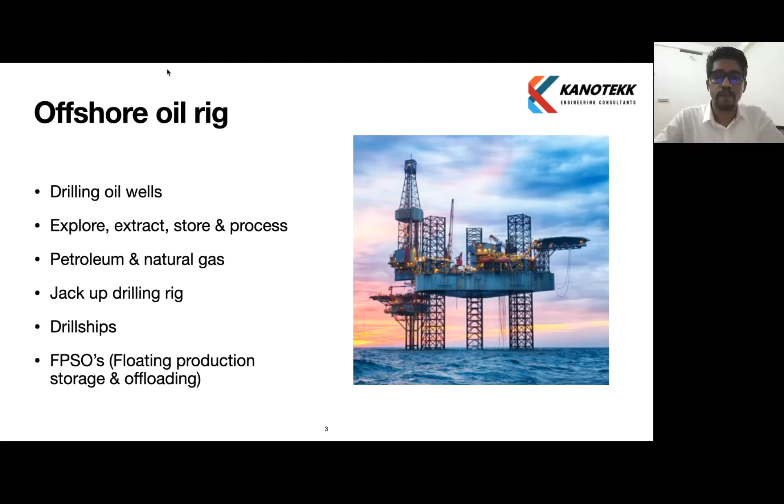Similarly, there is a jack house where the jacking gears are. Also the accommodation for the crew. And the leg has a footing called a spudcan. We will not be going into much detail on the entire oil rig features, but this is a brief intro before proceeding to the piping systems.

So for the offshore oil rig, we can see two views here. The first one is the machinery deck top view, where all the equipment is arranged. The second picture is the top view of an offshore oil rig, where we can see the helideck, drill floor, leg positions, crane arrangement, lifeboat arrangement, etc.

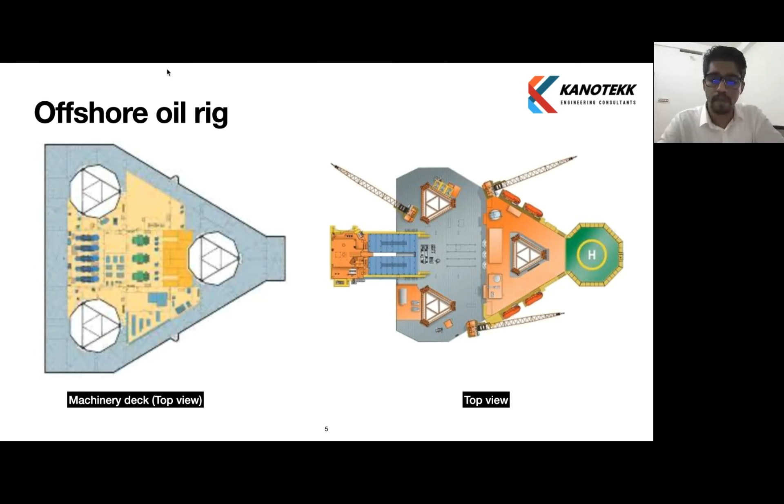Okay, so in this picture, we can see the offshore oil rig in two elevated conditions. One is just elevated above the water, and the next one is at a much higher height. It is just shown for better understanding. Below water, you can see how the legs are positioned. The footing of the legs has the spudcan.

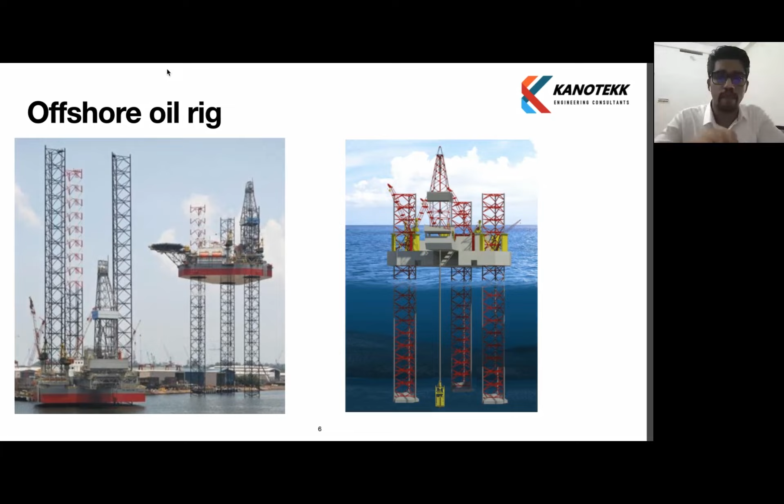Okay, just for better understanding, we will see how an offshore oil rig works. These oil rigs are not self-propelled, so for whatever movement is required at sea, we use tugs. The floating rigs are pulled using tugs. Now the process taking place is positioning of the rig to the drilling platform. The rigs are towed to the drilling platform.

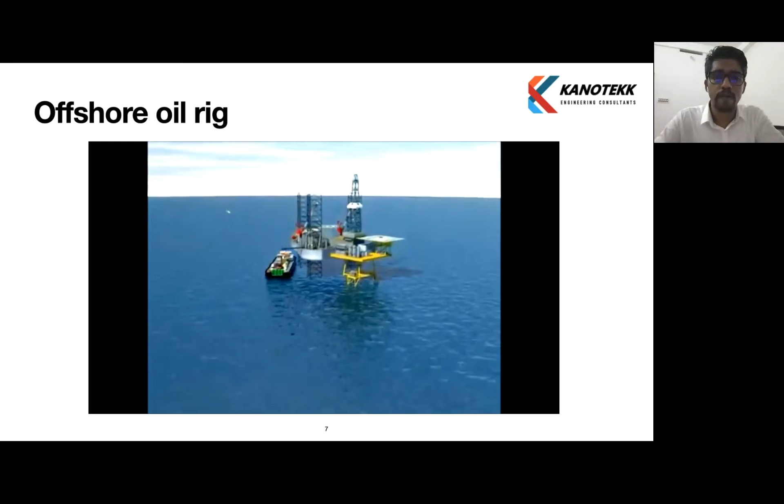The legs are lowered. The leg touching down now, that is called the soft pinning operation. Once it reaches there, the hull body is jacked up and the leg pierces down into the seabed. The rig is filled with water, which is called the preloading operation, which adds more load so that the leg pierces more. Again, the water is dropped out and it's jacked up. Now the cantilever is taken out to the drilling platform. That is the basic operation of how a rig is brought into location and drilling is initiated.

Next, we can categorize the third part to the drilling part, which includes the mud systems like low pressure mud, bulk mud, cement, and high pressure mud cement piping. Similarly, choke and kill manifold piping, BOP piping (blowout preventer piping system), drill water system, and well test oil and gas system. Also, the fourth part is accommodation piping systems, which includes the freshwater system and the earlier discussed sewage system, which comes part of the accommodation.

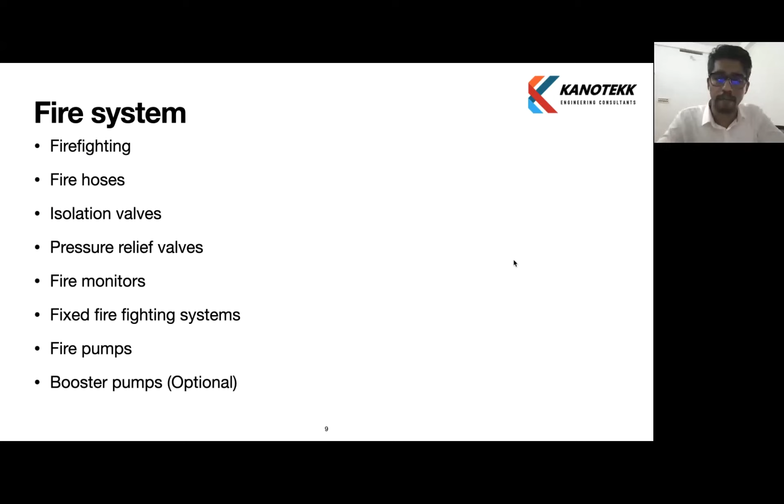First we will discuss the fire system. This system is used for firefighting, like any vessel, ship, or industrial purpose. So in this system, we will see how the system concept is, what all equipment are there, like fire pumps, fire monitors, fixed firefighting systems, fire hoses, valves, booster pumps, etc. We will go through the equipment and gain a concept of the system.

When we see an offshore oil rig fire system, it's basically categorized into two conditions. First is a floating condition, which we can see when the rig is floating, being towed to different locations using a tugboat. So this is a floating condition.

The next condition we are seeing is the elevated condition. In elevated condition, we can see the hull body of the rig is jacked up, so from the bottom of the hull body to the seawater level, that gap is called the air gap. So fire system will be discussed in two cases, one in floating condition and one in elevated condition.

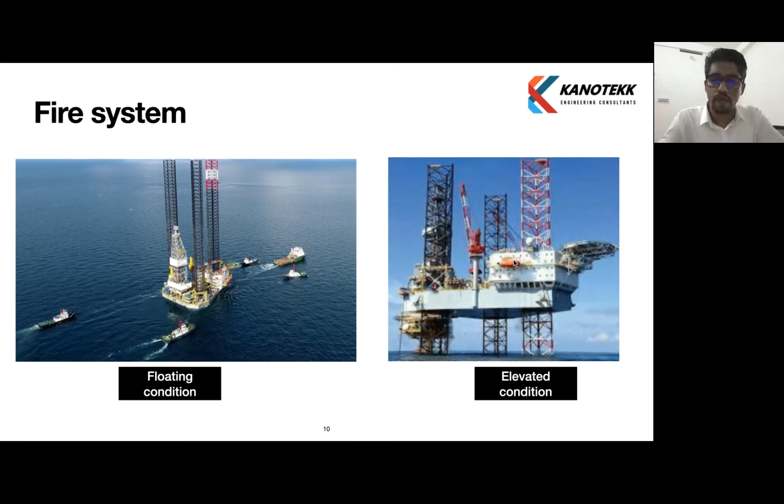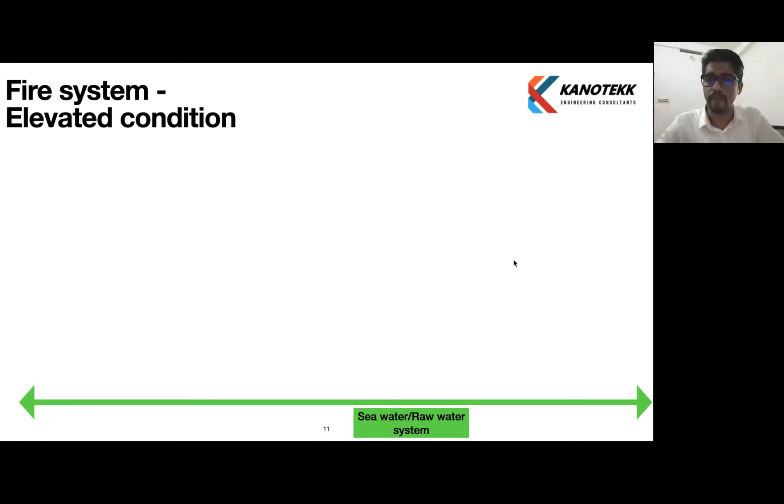So we'll see about fire system design. Now what we are seeing, the green line, is the seawater or raw water system. This is the main seawater system which is supplying the rig with all the seawater requirement. So in elevated condition, this is the first condition, fire system in elevated condition.

We will have two fire pumps, one main fire pump and one emergency fire pump. This is an ABS requirement - minimum two independently powered fire pumps are required in marine vessels, ships, offshore rigs, etc. Not only ABS, other classification societies like DNV, Bureau Veritas, and others all recommend these two fire pump requirements as per SOLAS requirement. So the main fire pump can be electric driven or engine driven.

Any form can be provided. Similarly, the emergency fire pump should have an alternate source of power, like in case of main power failure, there should be an alternate source of power. It should be either engine driven source or another emergency electric power source from an emergency generator, which is widely used.

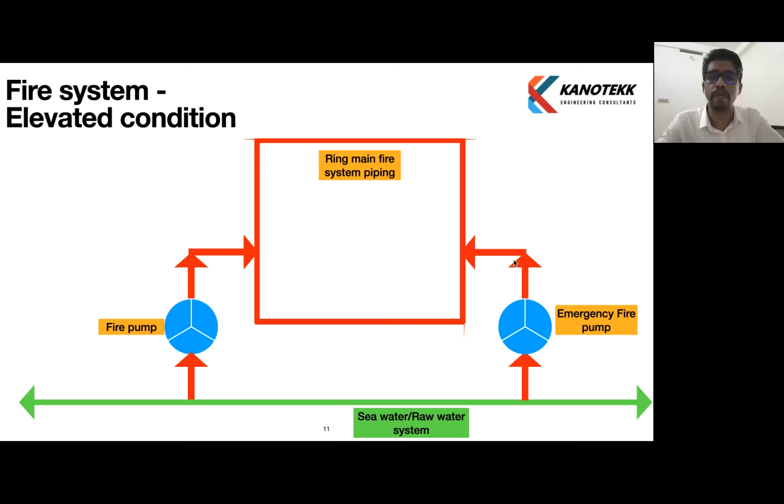So we will see the system. It takes suction from the seawater system of the rig and supplies to a ring main fire system. This is a general concept of a system - each rig will have a slight change in the design. In some rigs, it may not entirely be a visible ring, but as per design, it will be a ring main fire system which supplies to accommodation, helideck, drill floor, machinery space, and all decks.

So for firefighting, we'll have fire hydrant hose locations throughout the rig in all locations, all machinery spaces, accommodation, decks, main deck, drill floor, cantilever area, helideck area, etc. Helideck has a separate requirement - helideck needs foam firefighting. It is a marine class safety requirement that helideck needs foam firefighting, so for helideck we provide additional foam tanks which will supply foam for operation.

Similarly, helideck has two firefighting methods, which we will see in future slides. So this is a basic concept of a fire system, and we need isolation valves. We provide valves accordingly so that any breakage in the system at any part will not hamper the system, will not completely collapse the system.

It means if I supply to a machinery space, if there is an explosion and the fire line breaks, we should be able to isolate the fire line from the next compartment so that we do not lose the entire firewater in that compartment. If we lose firewater in that compartment, apart from the explosion, it will lead to flooding, which will lead to more damage. So to prevent that, we have to isolate the fire system from the next accessible compartments. So every compartment will have an isolation valve on the fire header system.

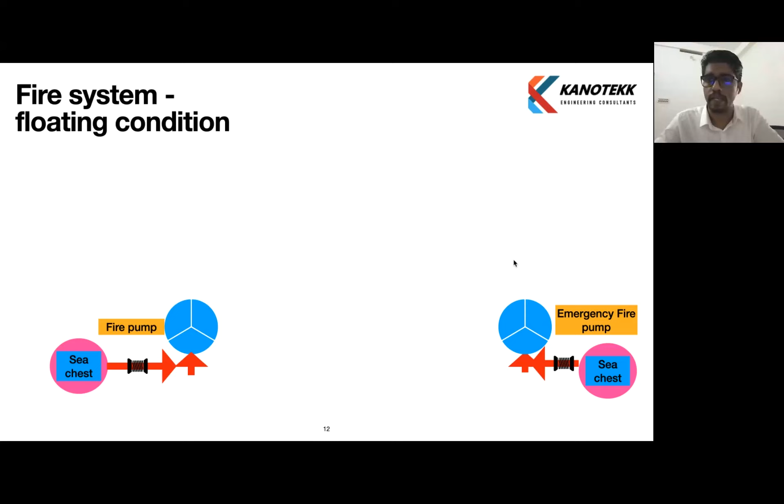So for taking suction for the fire system, in this floating condition, we take suction from the sea chest. The system entirely remains the same. The only difference is the suction point changes. All the supply, all the isolation, everything remains intact.

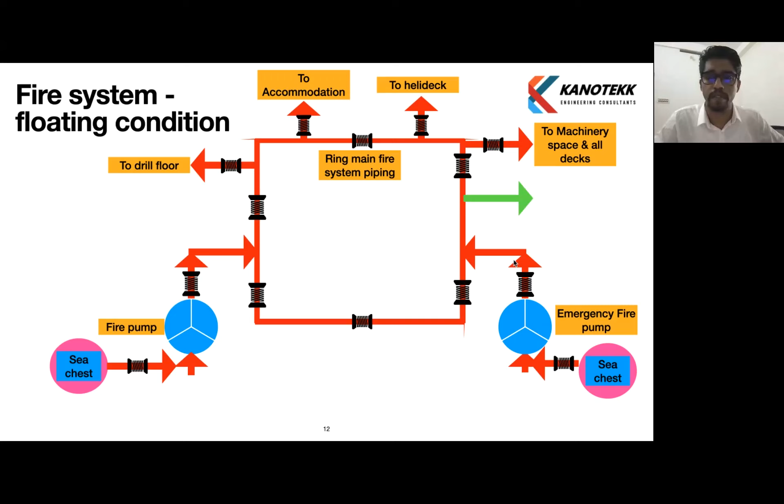So since the raw water system does not have a feed during floating condition, these fire pumps supply a feed to the raw water system. That is how the seawater system in the rig gets water during floating condition. But there will not be much consumption for seawater because in floating condition there is no drilling operation. Drilling operation always takes place in elevated condition. So floating condition just has a minimum requirement for seawater, which will be met using fire pumps.

Okay, so this is the basic concept of the fire system. It has two conditions, elevated and floating. In elevated condition, suction is taken from the seawater header lines, and in floating condition, it's taken from the sea chest. Once this concept is clear, designers can design accordingly. Based on the rig design, routing can be done accordingly, and valve placing can be done in a wise manner.

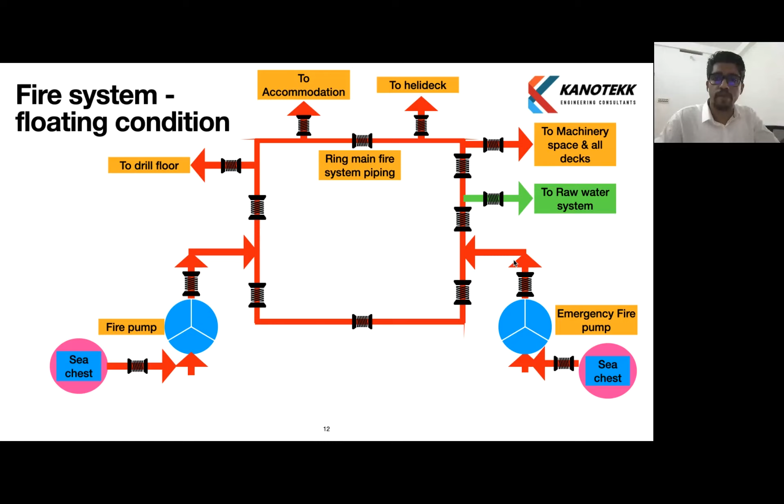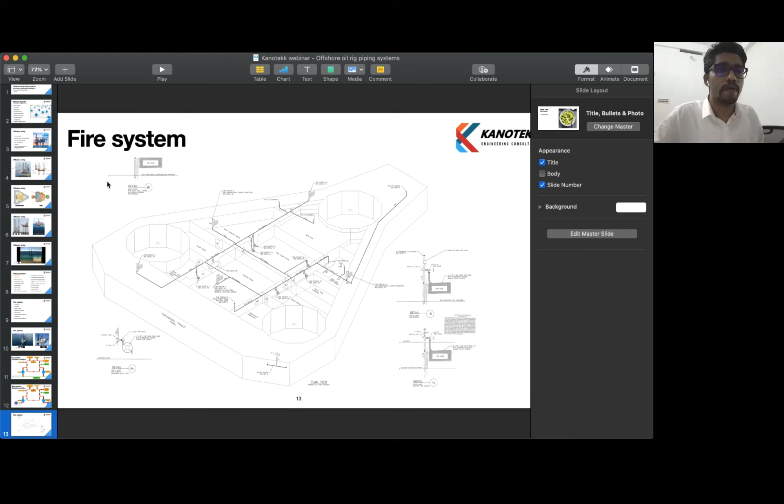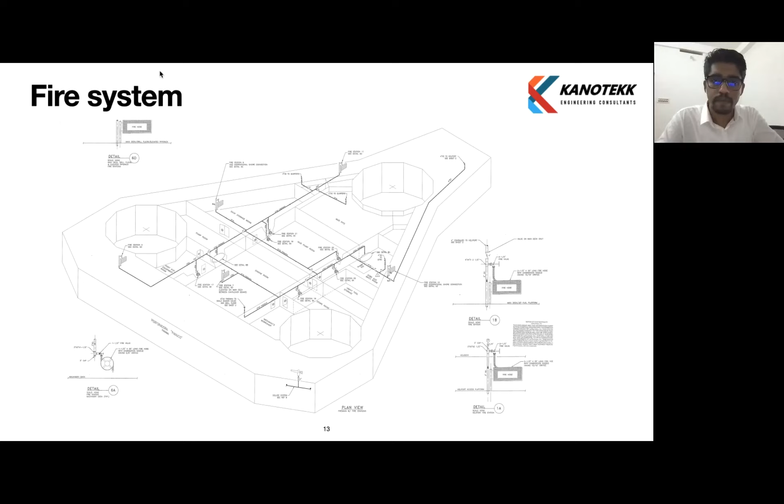Okay, so fire system design, we can see the layout, how the pipes are routed through the port side and starboard side. This is the general layout; each rig will have a different design. Similarly, there is supply to the drill floor, cantilever area, and shale shaker area. So there is a detailed design part.

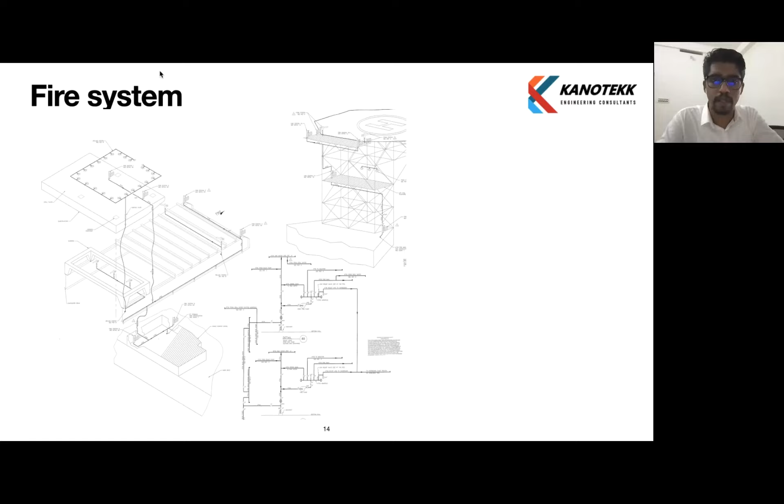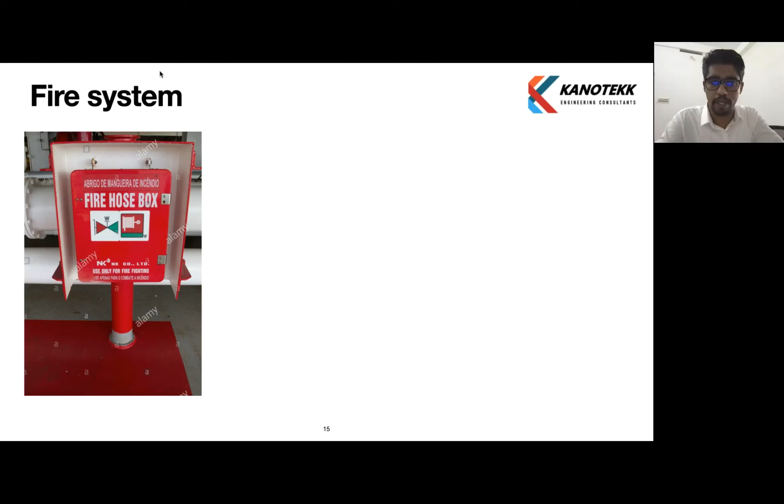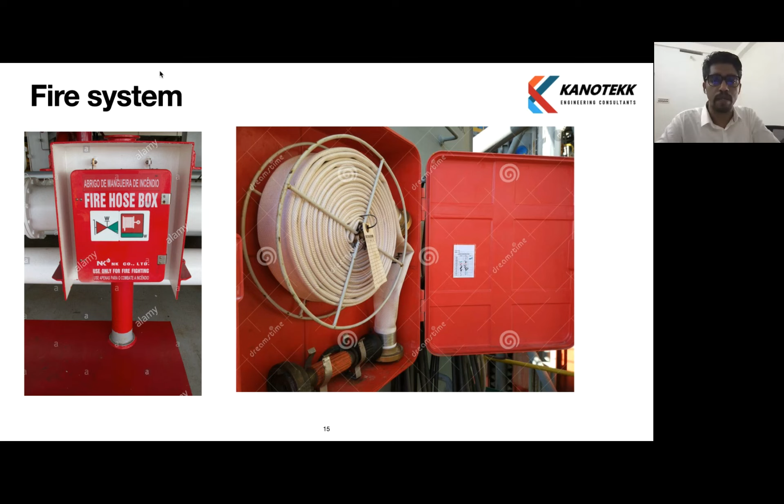Okay, for the fire system, we mentioned that fire hose boxes are positioned in different locations throughout the rig. So once we open the box, this will be the arrangement of fire hoses, like how the hoses are kept inside with a nozzle connection.

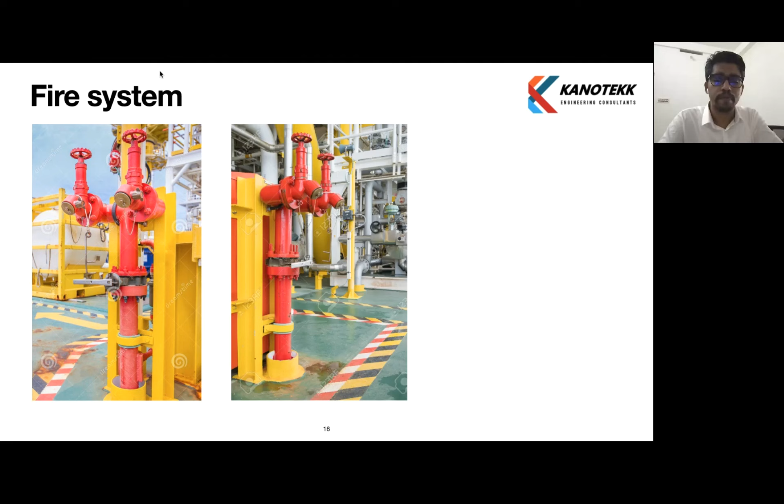Okay, another view of hydrant valves. It's another view of the hydrant valves.

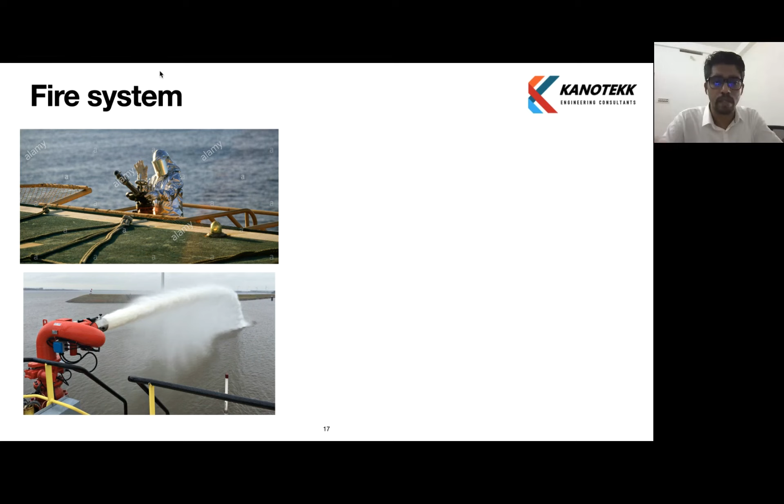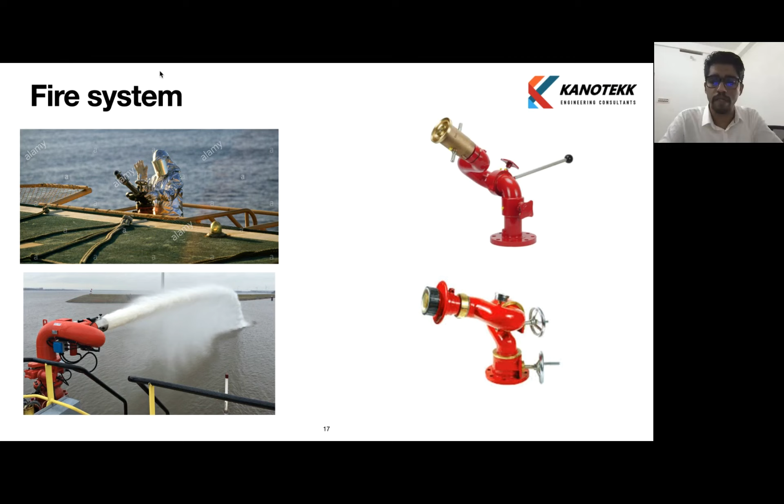Okay, this is for the helideck. For helideck firefighting, what we are seeing is a person operating a fire monitor. We'll see more photos on that. So when a fire monitor is in operation, this is how the throw of water can be seen. This is the view of fire monitors, which have movement; we can manually operate it to the required direction.

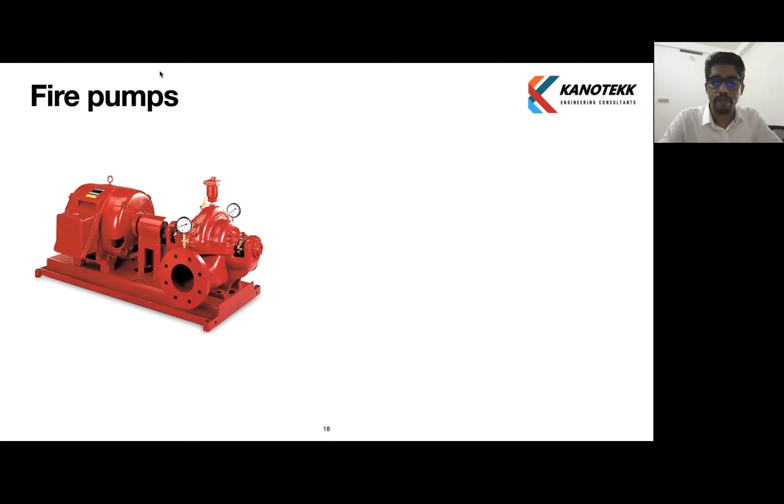Okay, this equipment we are seeing is a fire pump. The second picture is a fire pump layout in a fire pump room. The second one is an engine-driven fire pump, where we can see the exhaust lines and all the routing provided.

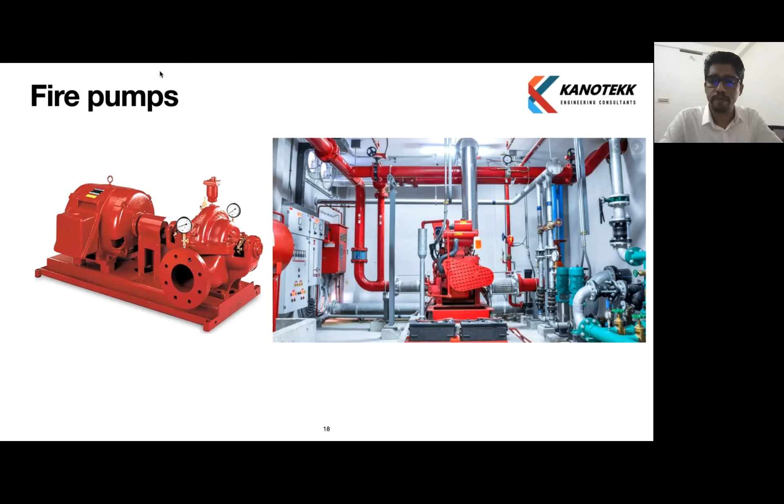Okay, fire system in helideck. We have actually two options for firefighting in the helideck.

One is using fire monitors, that is the picture which we see here. Fixed monitors are located throughout the helideck at different points, so it can be operated by personnel.

Similarly, the second picture shows the deck integrated firefighting system, called the DIFFS system. This deck integrated firefighting system enables firefighting without direct personnel operating equipment. It just has to be activated from the activating point, which is below the helideck.

Once activated, nozzles are positioned throughout the rig, throughout the helideck point. The usual arrangement is around 16 to 20 nozzles, but depending on the helideck size, this nozzle number varies.

So these nozzles, once the system is activated, spray water, which we can see now. It will spray water for 5 minutes, which is as per the rule requirement.

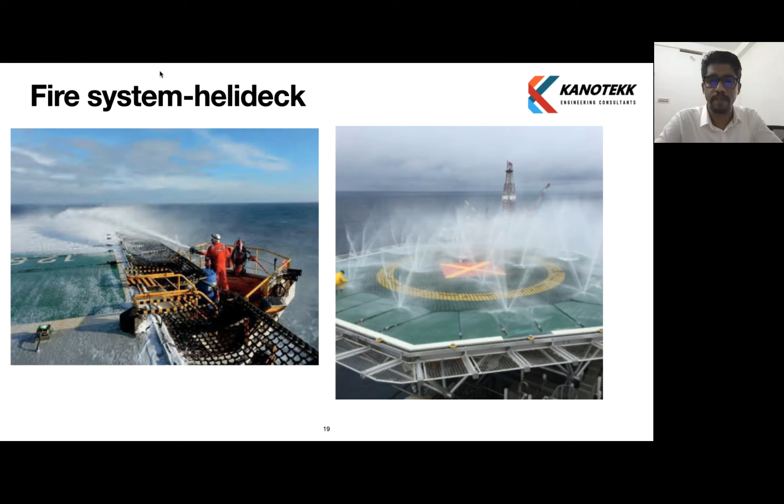Okay, we earlier discussed the fixed firefighting system. So fixed firefighting system, like now we can see in the slide, first picture, which is the emergency generator room CO2 cylinders. Similarly, the next picture shows the main generator room CO2 cylinder arrangement.

So the emergency generator room is actually a small room with less volume, so based on the volume calculation, few cylinders are required for fixed firefighting. Similarly, the main generator room, which has a huge volume, so the cylinder numbers increase accordingly.

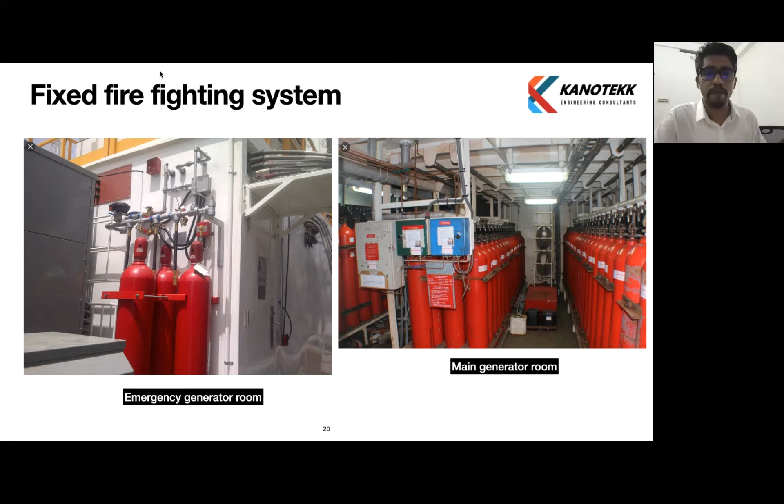Okay, so that was about the fire system.

So we will go to the next system, which is the bilge system. Bilge system is widely seen in ships and other vessels. Similarly, in offshore oil rigs, we have a bilge system.

It is a simple system used for removing the bilges from the offshore oil rig. A bilge is an oil plus water mixture, or oil plus water plus fuel mixture, which accumulates in various parts on the rig. So these bilges, once accumulated in a location, we have to remove them on a continuous basis to keep the machinery space safe, clean, and to prevent flooding, etc.

Various equipment used in the bilge system includes bilge pumps, bilge holding tank, which is also called a skimmer tank, similarly oily water separator, or sludge tank, which is also called the dirty oil tank. We will see what is the concept of the system.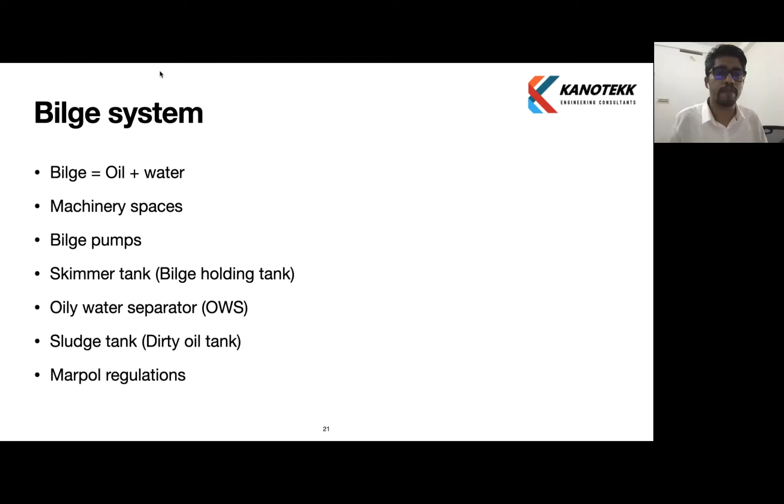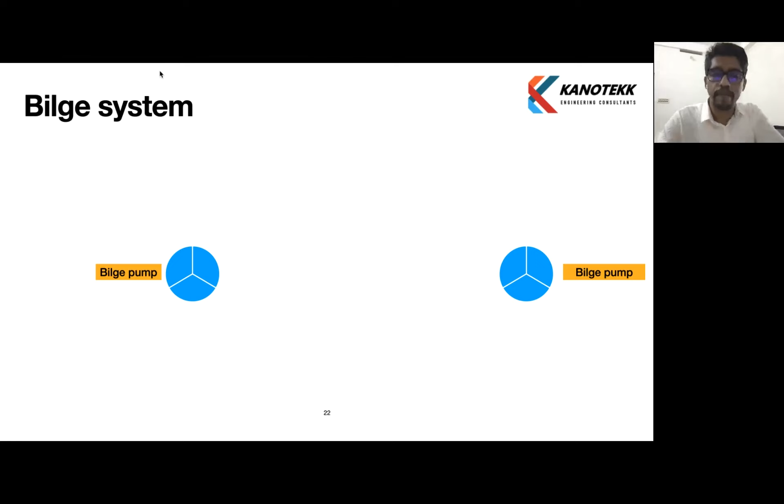Okay, the bilge system has two pumps, like two independently powered bilge pumps, are required. So every offshore oil rig will have a minimum of 2 bilge pumps, and it will be taking suction from bilge wells.

So bilge wells are located in the machinery spaces like main generator room, fire pump room, sewage treatment plant room, freshwater maker room, similarly air compressor room. So all these machinery spaces, whichever rooms, will have bilge wells from where we can take suction to bilge pumps.

So independent suctions are taken from each compartment. The common suction header which we see here is actually placed in the bilge pump compartment. It is a usually small compartment, so near to the bilge pump are the headers.

So separate bilge suctions are taken from each bilge well up to the bilge pump suction, and the discharge is taken to a bilge holding tank. So bilge pumps take suction from bilge wells and discharge to the bilge holding tank, which is also known as the skimmer tank.

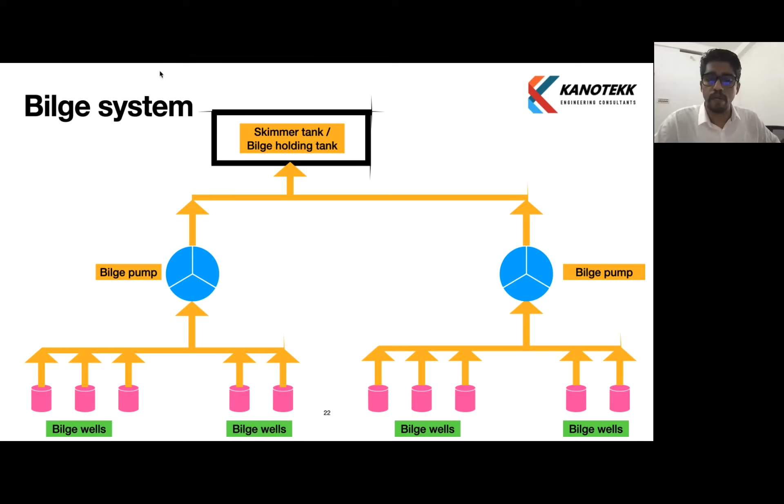So it holds the bilge water, and from the bilge holding tank, the suction is taken by the oily water separator from the bilge holding tank.

So when we talk about the oily water separator, it is an equipment which separates oil and water. The function of the oily water separator is to separate oil and water. We can see in the picture how the system works, like bilge pumps taking suction from bilge wells and pumping it to the bilge holding tank, and the oily water separator taking suction from the bilge holding tank.

So once the oily water separator separates oil and water, the clean water we can discharge overboard. By clean water, we mean there is a value, like 15 ppm, parts per million. So 15 parts per million of oil should be the maximum present in the water when we discharge it overboard.

So there is an oil content monitor machine which is part of the oil water separator. This will measure the oil content in the discharge, and if it is above 15 ppm, the oil water separator does not discharge it overboard.

Similarly, there is a log recording in the oil water separator. Any discharge which is made from the oil water separator gets recorded in it, even the coordinates, time frame, all these details will be recorded. So that is about the oil water separator operation.

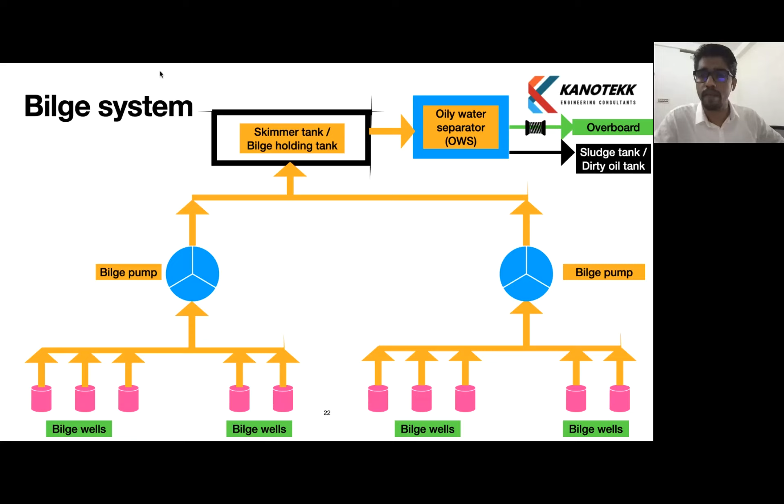So that is where the dirty oil tank or sludge tank comes into place. This oily water separator will separate oil and water. The separated oil will be stored in the sludge tank or dirty oil tank. And once it fills up, we can discharge it to a supply vessel. We cannot discharge the dirty oil directly overboard, so this has to be stored and kept. On a visit of the supply vessel, we will empty the sludge tank to the supply vessel.

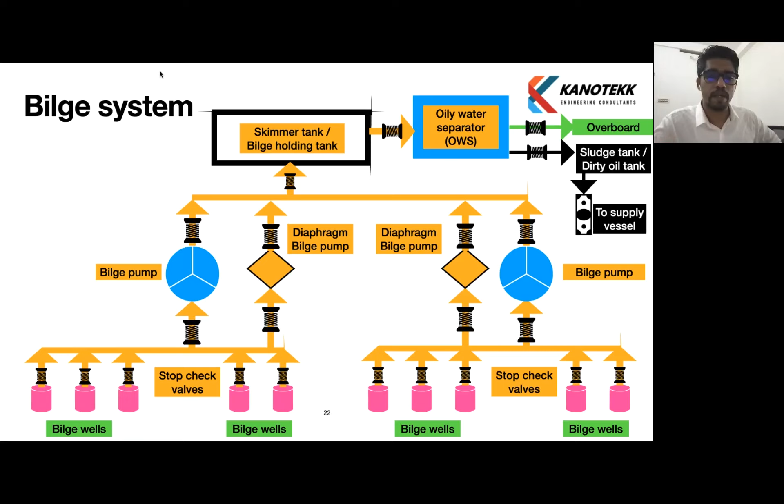Similarly, in the system, when we see the bilge well suction area, there is a class rule requirement of stop check valves. There should be a stop valve and check valve, that means an isolation valve and check valve. Another option we can consider is an SDNR valve, screw down non-return valve, which is a single valve which meets the rule criteria.

This rule is kept to prevent bilge contamination. When we take a suction from one bilge well, it should not flow to the next bilge well, which is a safety and hazard aspect for the vessel. To meet this rule requirement, we have to give stop check valves, which is a form of SDNR valve. SDNR valves prevent the return flow of water to the bilge well. Once suction is taken, the fluid always stays inside the piping system. It will not flow back to the bilge wells.

Similarly, bilge pumps, which we widely see in the rigs, are centrifugal type. The usual capacity of these centrifugal pumps ranges from 80 to 140 cubic meters per hour, and the discharge head will be around 40 to 60 meters, depending on the vessel requirement.

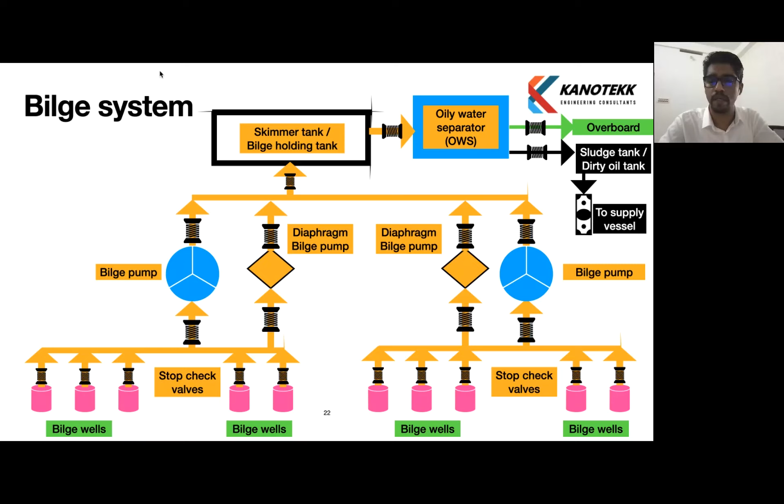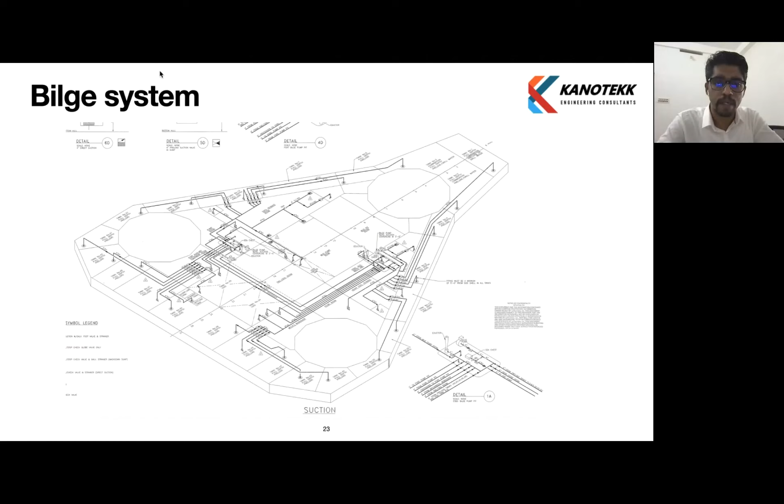So this is a basic concept of the bilge system. Designers can improve on this system as per the requirement for each vessel. Now what we are seeing is a bilge system diagram with a detailed layout. We can see individual lines from each tank or each location, each machinery space. All these separate lines are taken up to the bilge header, the bilge suction. Similarly, we can see the bilge discharge.

Discharge we discussed in the system. Discharge will be done to the bilge holding tank, from where it goes to the oily water separator, which separates it; clean water is discharged overboard, and the oil which is separated stays in the dirty oil tank. It's a very simple system.

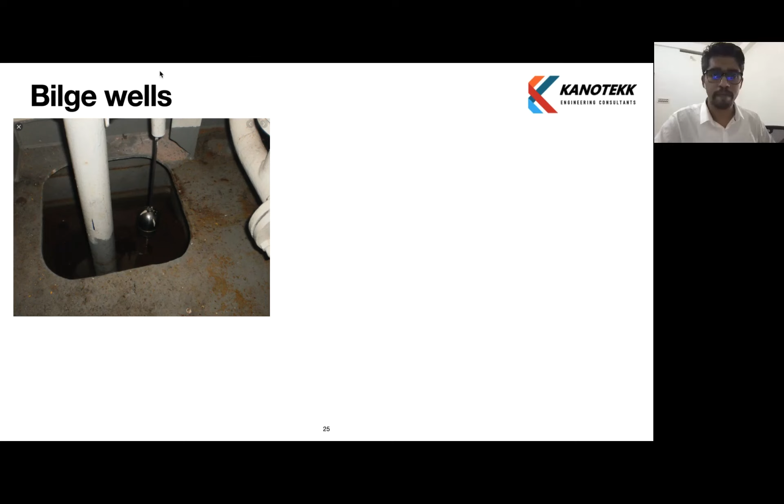Now, we earlier discussed the bilge well. This is how a bilge well will be seen in the vessel. It will be a lowered portion on the machinery deck. The pipe which is seen is a suction pipe. Similarly, another bilge well, and also a different photo of a bilge well.

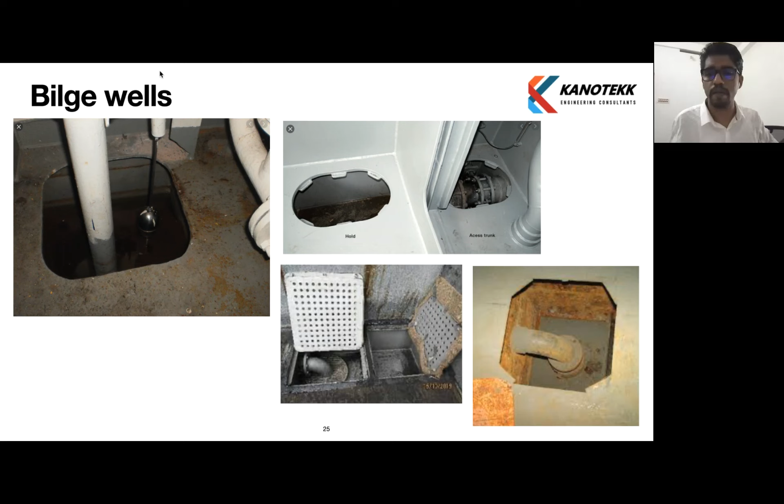So this is a photo of a bilge well. We can see the suction pipe inside. There will be a strainer at the end of the pipe inside the bilge well, which is also called a rose box. It is a strainer. Next, we can see the bilge pumps. These are different bilge pump arrangements, just a pictorial representation.

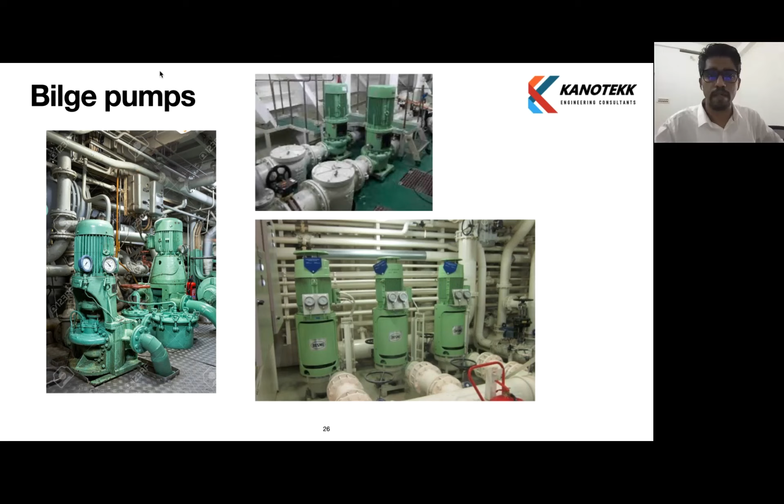Also, the sludge quantity will be much less compared to the bilge suction happening in the machinery space, so the sludge pumping flow rate will be much lower. Sludge pump capacity will be in the 15 to 25 cubic meter range. That will be the range of the sludge pump used in a vessel.

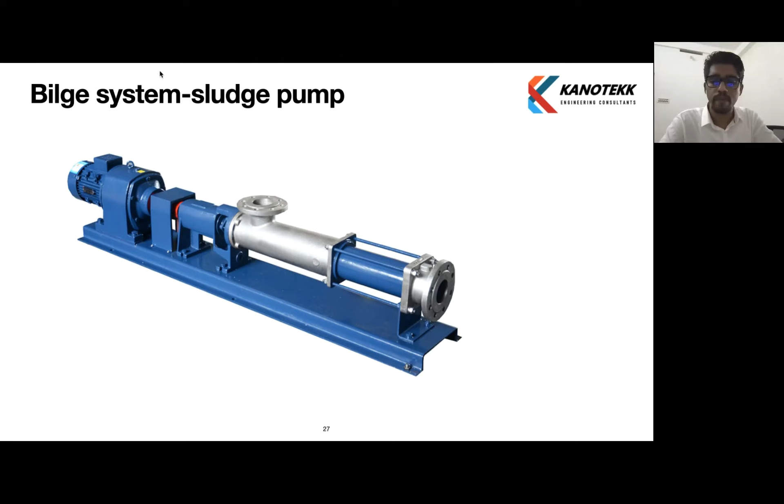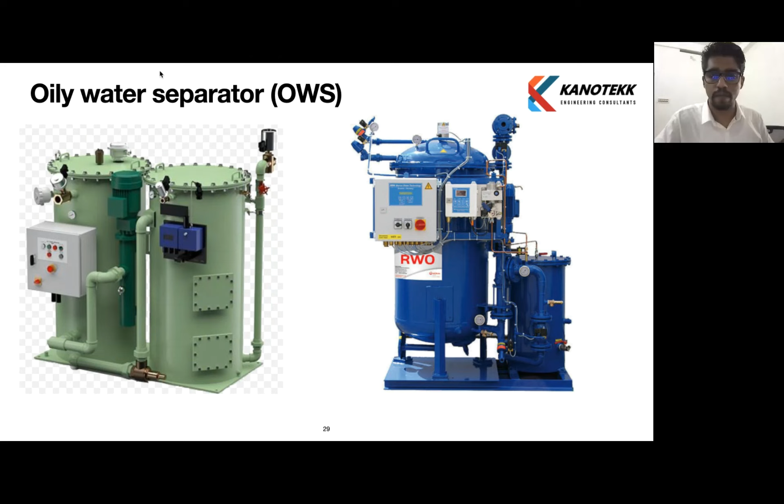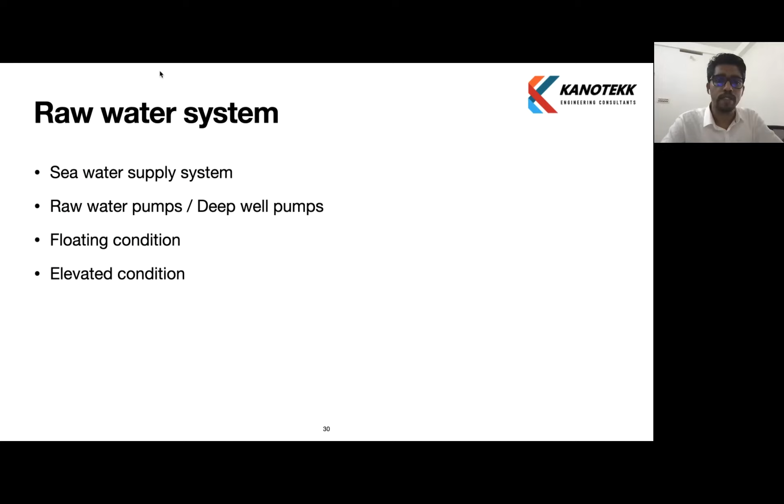Okay, so we discussed the bilge system earlier. Now we will see the raw water system. The raw water system is basically a seawater supply system, used to supply seawater throughout the rig. In this system, we will see equipment like raw water pumps, which are also called deep well pumps because they are submersible type pumps used in the rig. Two conditions will be considered: floating and elevated.

Okay, raw water system in floating condition: as we already discussed, the rig will be floating for transporting the rig, etc. Similarly, in elevated condition, the hull body will be jacked up. So we will discuss two cases for the raw water system.

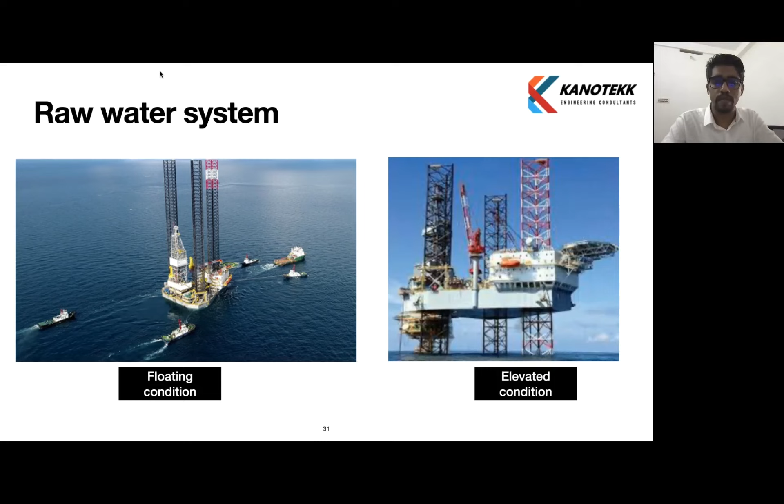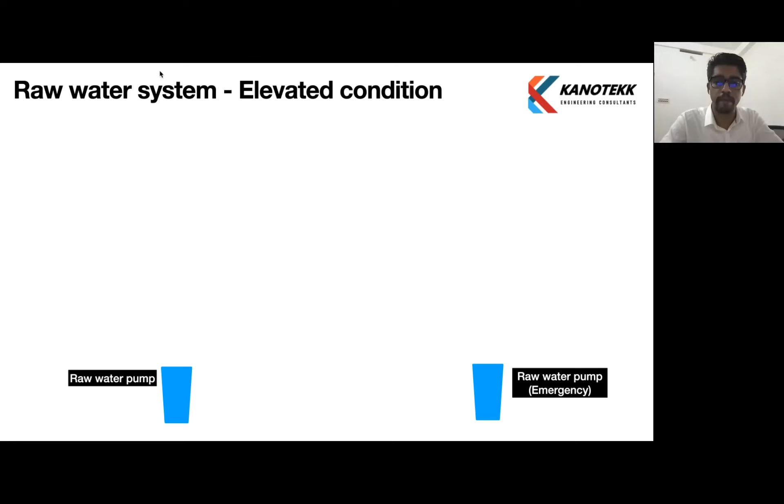Okay, raw water system in elevated condition: we have raw water pumps like the main raw water pump. There will be more pumps, of which one will have emergency supply. These are submersible pumps immersed below sea level. Water is pumped to a ring main header system, which eventually supplies the fire system, drilling mud preparation, freshwater maker, and preloading system.

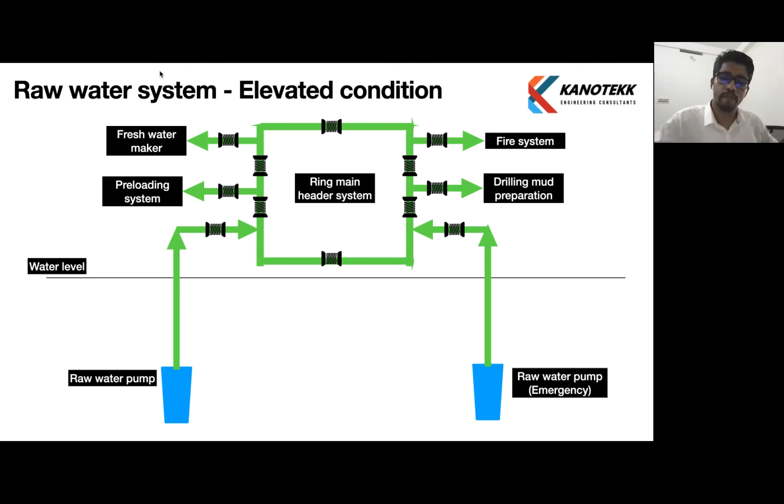This system will have sufficient isolation valves so that if the system fails or the piping breaks in one location, we are able to isolate it. That is the concept of raw water system design. We will discuss the preloading system in the coming slides. These raw water pumps usually have a capacity of around 1600 to 2200 gallons per minute. Flow rate supply 2200 GPM.

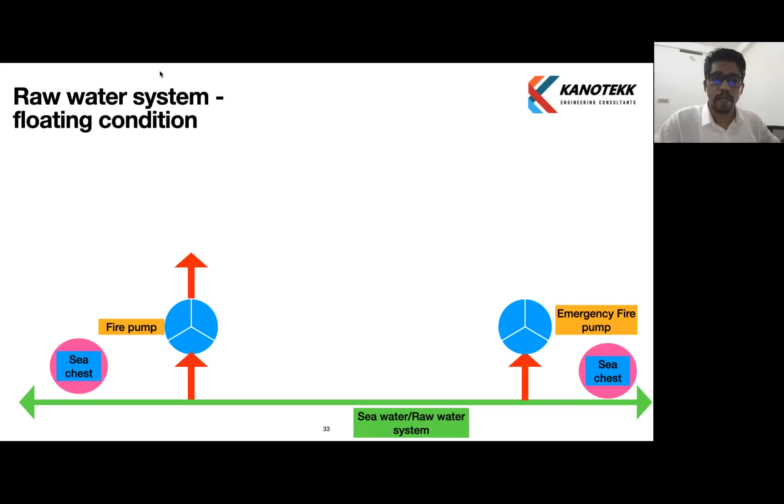Okay, raw water system in floating condition: in this case we cannot lower the deep well pumps. So we supply seawater throughout the rig for seawater applications using fire pumps. They take suction from the sea chest because the rig is floating. So in floating condition, deep well pumps are disabled.

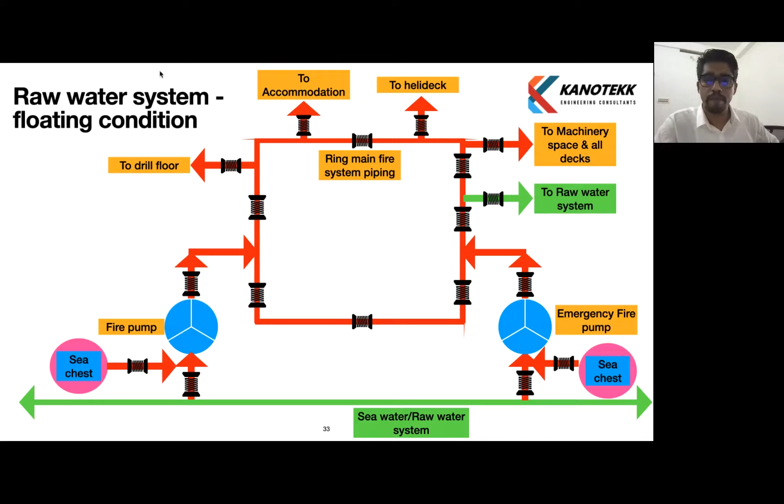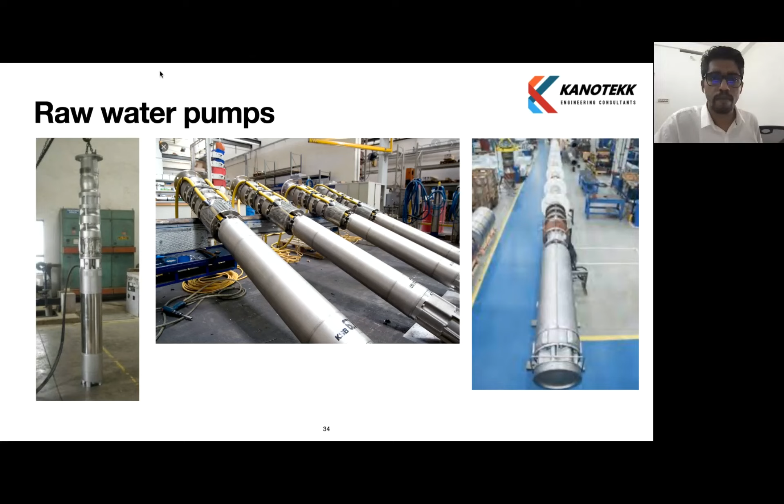The operation is we fill the hull tanks, the preload tanks, with water. The load of the water will be approximately equal to the rig weight. So double the rig weight will be applied to the legs so that the legs penetrate the seabed, which will provide more stability and positioning to the rig.

After it is positioned, the preload tanks will be emptied directly to sea. That is preload dumping; we will see it in the next slide. Then the hull body is jacked up according to the operational height requirement. So we'll see the preload system. In this video, we will just see a small portion.

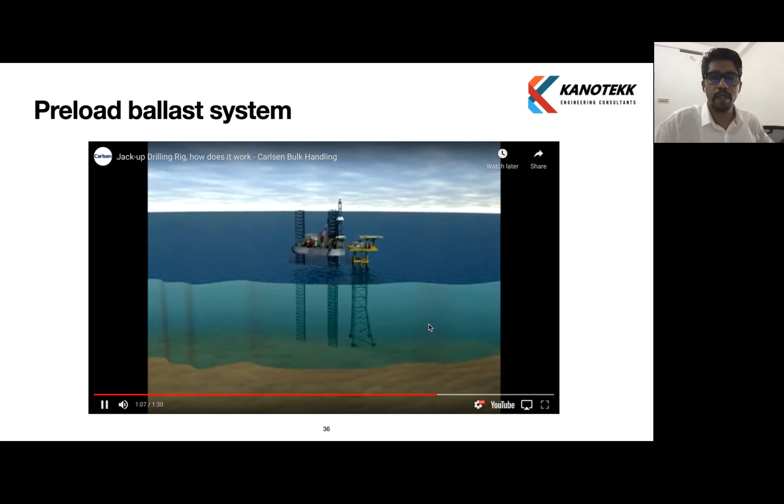Okay, now the leg is lowered. So after this, we fill the preload tanks, which we can see in this with blue color they have filled, and so the weight addition enables more leg movement downward, and the water is empty. Okay, so this we earlier saw just to describe the preload. We have seen it again.

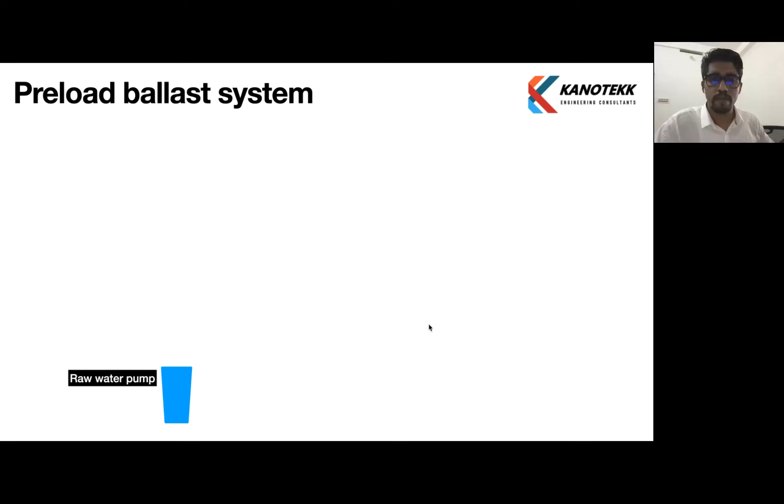Okay, so the preload ballast system, which we are discussing now, is basically the seawater system which is supplying to preload tanks. So there will be usually around 16 to 24 tanks. Depending on the rig design, there will be more tanks, but generally we see the 16 to 24 range of preload tanks. So these preload tanks enable the preloading operation. There will be isolation valves, and there will be preload pumps in a few rigs due to the heavy water requirement.

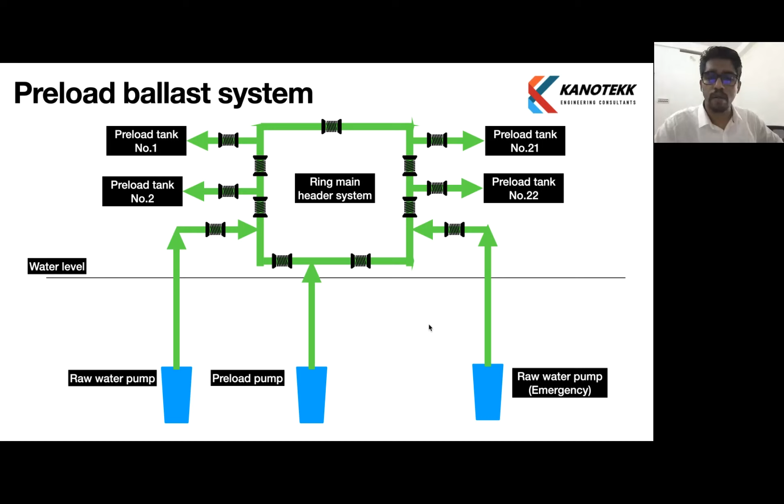Earlier we discussed the raw water pump capacities; it will usually be 1600 to 2200 gallons per minute. Similarly, preload pumps will be higher capacity, like 5000 to 6000 gallons per minute. So preload pumps are used only during preload operation due to the heavy water requirement, to reduce the operating time of the rigs. Most of the rigs prefer the use of a preload pump.

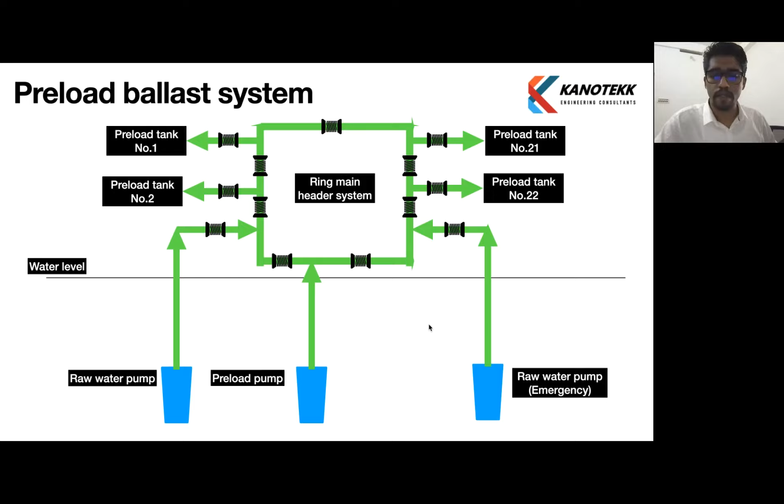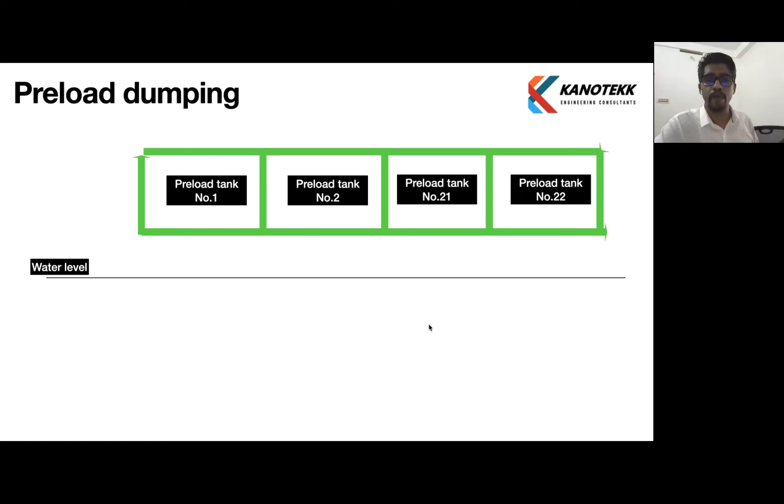Okay, so that is the preloading operational system which we saw earlier. Similarly, we will see the preload dumping system. In a preload dumping system, the hull of the rig will have various preload tanks, like 16 to 24 tanks, as we discussed earlier. It will be dumped directly to the sea. Each tank will have a dumping mechanism, which we will see in the next slides. We will dump it directly to the sea. There will not be any machinery operation. There will not be any pumping operation.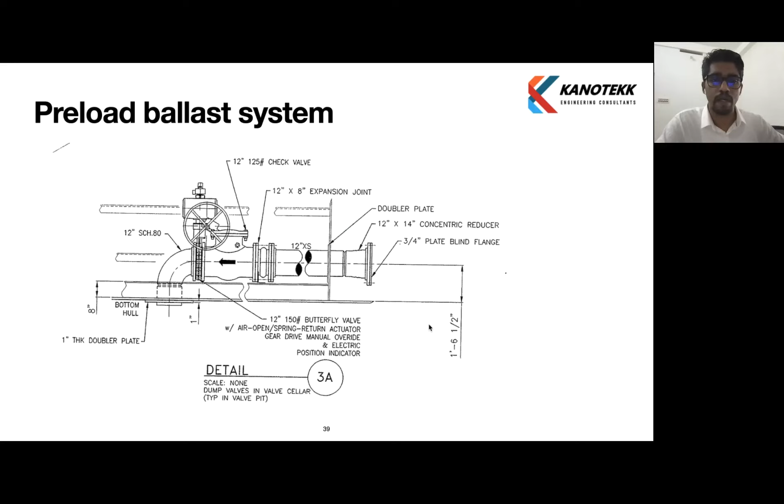Okay, so this is the usual dumping arrangement provided in the preload tanks. There will be a pipe which has an isolation valve, a check valve and an expansion joint. This dumping system is present in all the preload tanks. These valves can be operated from above the tank; there will be reach rods which extend above the tank. And we can see in this diagram, the line size is 12-inch schedule 80. So 12-inch pipes are used. Depending on different designs, the sizes change.

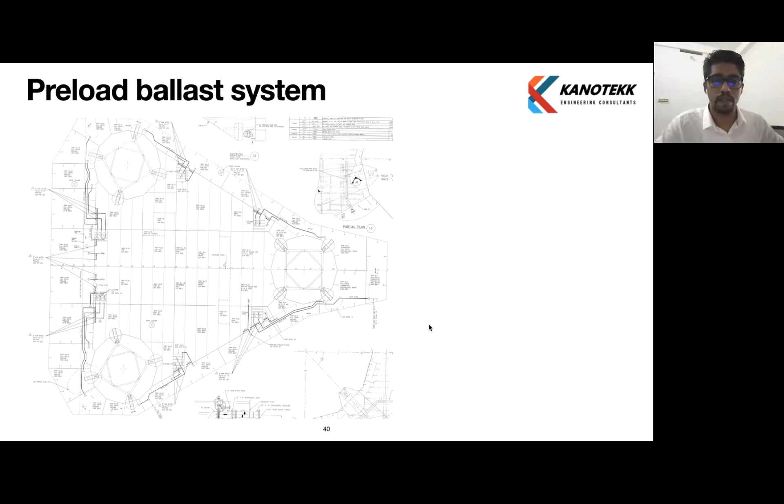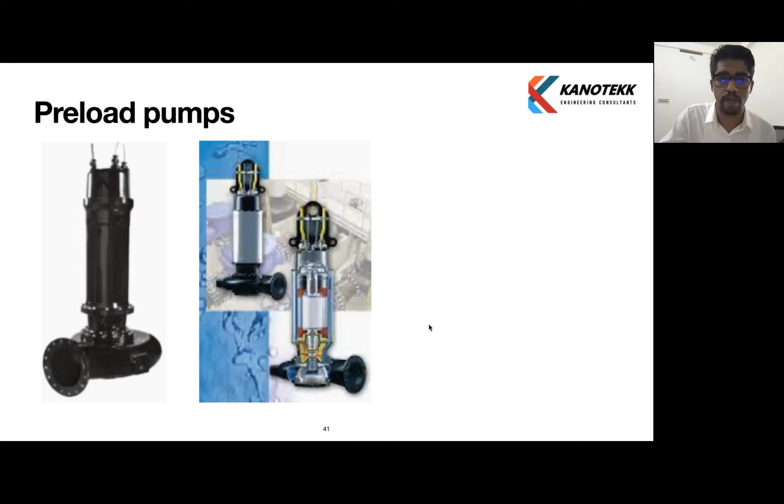Okay, so the preload ballast system, we can see the system. It's a representation of the preload tanks and lines. Okay, so now we can see preload pumps, a representation of preload pumps. This is a design of preload pumps. These are submersible pumps, operated using a hose reel mechanism, etc., which we lower to the sea during the preloading operation.

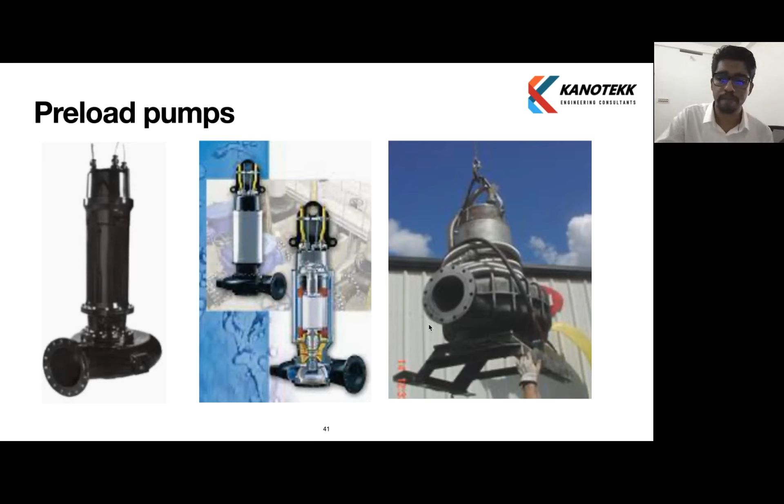Okay, so with that, we actually finished the presentation. We can move to the question and answer session. Whatever doubts, any slides which you have doubts on, we can go to the slides again if required to clear the doubts. So you can post the questions in the Q&A shown here. We have a few questions.

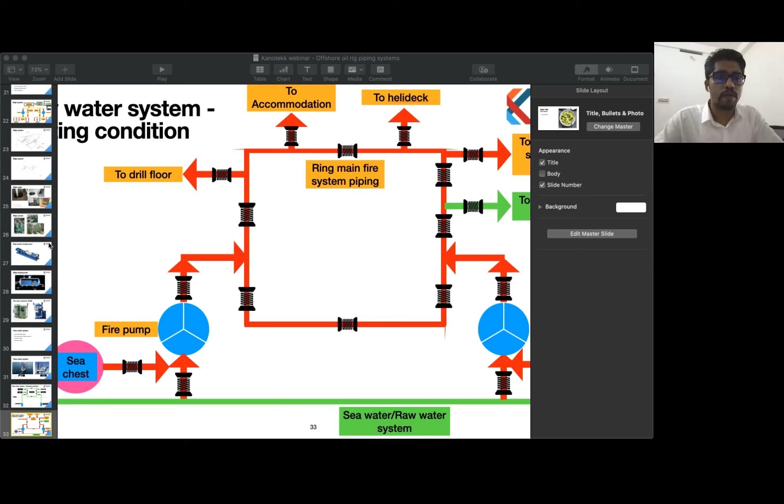First question: how will seawater be available in the elevated condition in the fire main system? Okay, this question was asked initially. I'll explain with the slide itself. For seawater availability during elevated condition, we will discuss the raw water system, which is a seawater system. So this is the raw water system in elevated condition. In elevated condition, submersible pumps provide water to the seawater header system. The entire seawater headers will be fed by the raw water pumps, which are submersible pumps.

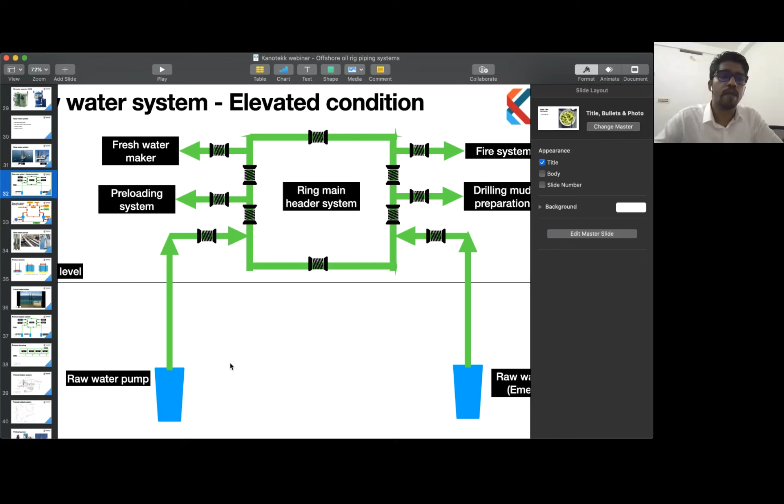So from this header, there is supply to the fire system, which we can see. From the seawater header, we are taking suction to the fire pumps. So these fire pumps in elevated condition get water from the seawater system. Okay, next question: will emergency bilge suction be available in rigs? Yes, emergency bilge suction is available in the rigs. The emergency bilge suction line will be provided in rigs similar to marine vessels.

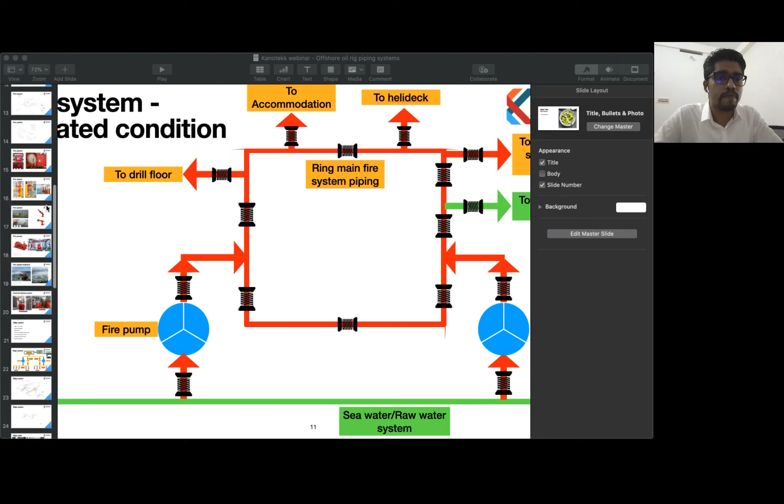The emergency generator room being a small room with less volume, we can manage with fewer cylinders. That's why we usually see 3 to 4 cylinders depending on the volume of the room. For the main generator room, it usually comes to around 80 to 100 CO2 cylinders. For bigger volume compartments, it can go up to 120 cylinders. Okay, there is a question on slide 40. We will go to slide 40.

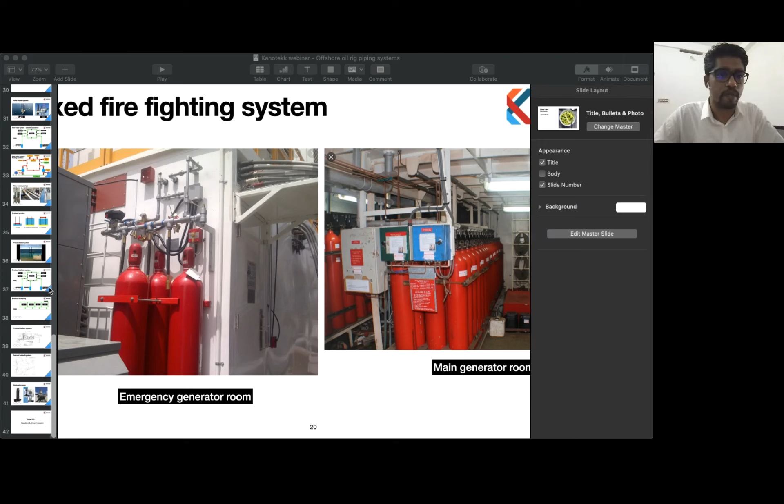Okay, in slide 39, this is a preload dumping system, which is present in all the preload tanks. Because during operation, once the preload tanks are filled with water, I mean during loading, and the legs are lowered, after that we have to empty the preload tank. So for emptying the preload tank, we have a similar kind of arrangement in each preload tank. There we can see that at the hull bottom, there is a pipe with an elbow.

After that, there is an isolation valve. The valve shown here is a butterfly valve with a gearbox arrangement, which will have an extended spindle to the top of the tank, so that we can operate the valve from the main deck. Before the butterfly valve, there's a check valve, and there is an expansion joint with a pipe extension. Okay, so this is the arrangement.

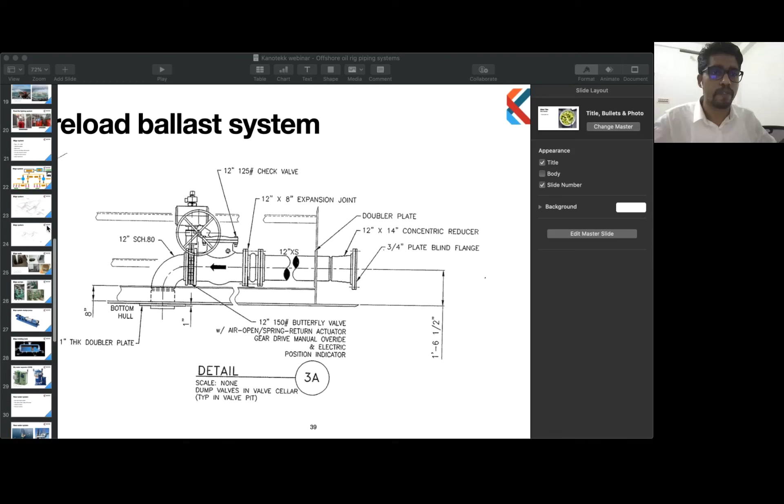Okay, next question: is bilge stripping for preload tanks available? Yes, a bilge stripping system is given for preload tanks, because even if you dump the entire preload tanks, there will be a volume of water, which is actually a huge volume compared to the area of the tank. This will stay inside the tank. To empty the water, we have bilge stripping lines given to the preload tanks. I'll show you a bilge drawing, this bilge section.

In this diagram, we can see the lines taken from the tanks. Other than machinery spaces, we can see lines taken from each tank. So these are the bilge stripping lines, which go to the bilge header. The bilge pumps are used to empty whatever preload is remaining in the preload tanks.

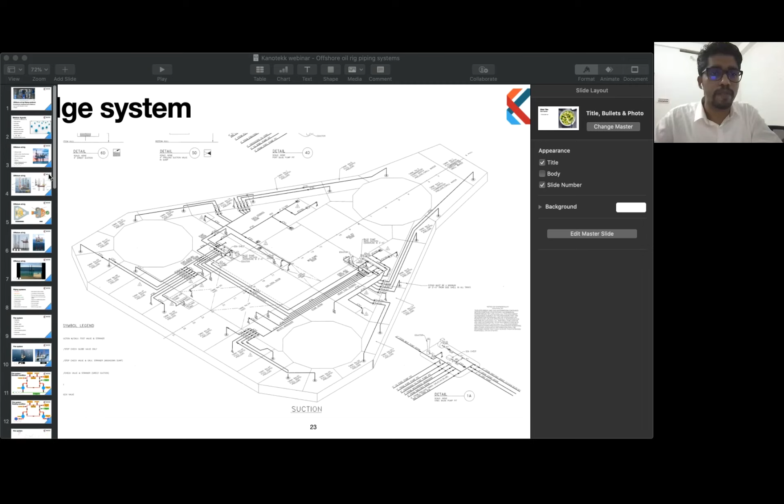We discussed in this webinar today 4 systems: fire system, bilge, raw water, and preload. Similarly, other systems are there which we will be going through in the next webinars, which we will announce. So we can cover 3 or 4 systems in each webinar.

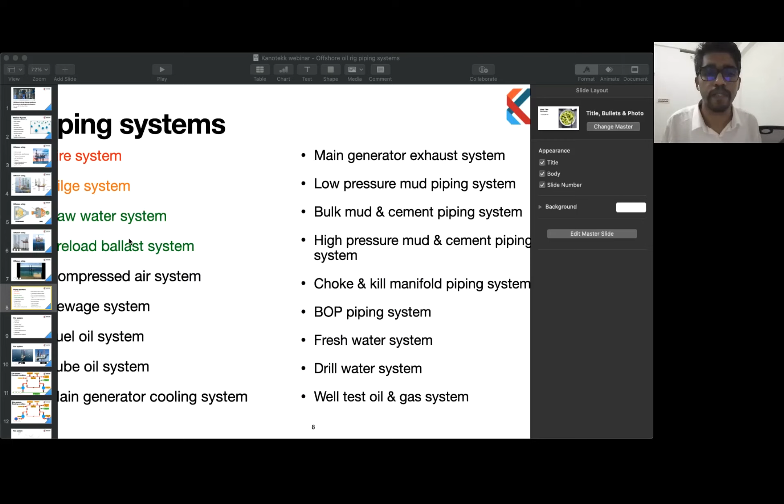Also, we have one more question. Noticed a blind flange at the suction point in the preload tank. Could you please explain its requirement? It is not at the preload tank suction point. I think the blind flange you must have seen is in the dumping line. That is not the suction point. The preload tank dumping line has a blind flange. It will be normally closed. For any maintenance operation inside the tank, etc., we close it with the blind flange.

Similarly, spectacle blinds are provided, which have one side open and one side closed. That is also used because for certain tanks which we are not using, to prevent a malfunction, we can use the spectacle blind to blind the line and close it permanently. And during maintenance, etc., for the safety of the person working inside the tank, it's usually closed. Even in elevated condition, as a safety guideline, safety protocol, it is mentioned in the operations manual.